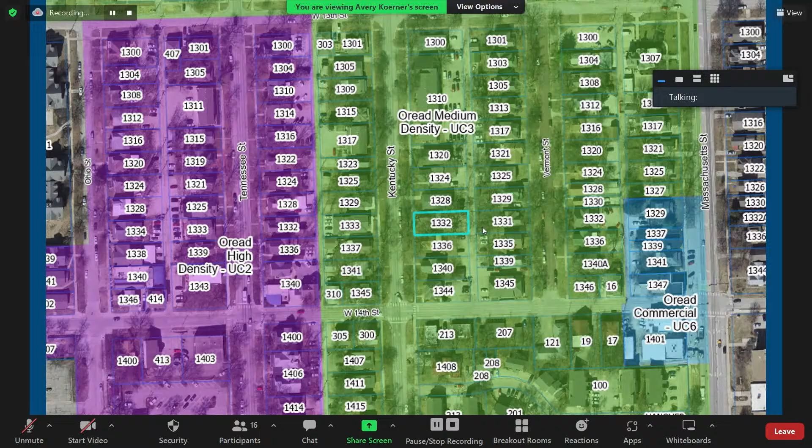The existing structure at 1332 Kentucky Street is a two-story dwelling with a stone foundation and crawl space. The rear portion of the structure is only one story, and there's a single-story addition on the south side. The applicant is requesting to demolish the two single-story portions of the structure, as well as the stone foundation of the original structure. The stone foundation would be replaced with a cast-in-place footing and foundation wall to allow for a full basement. A new single-story addition would be constructed on the south side, and a two-story addition would be constructed to the rear on the east elevation.

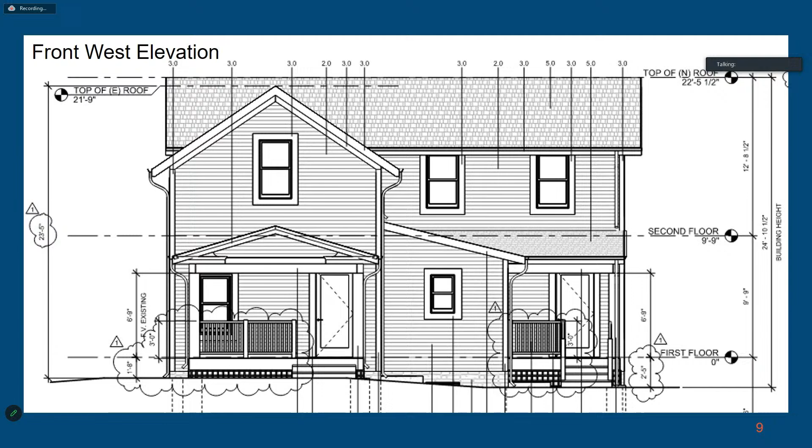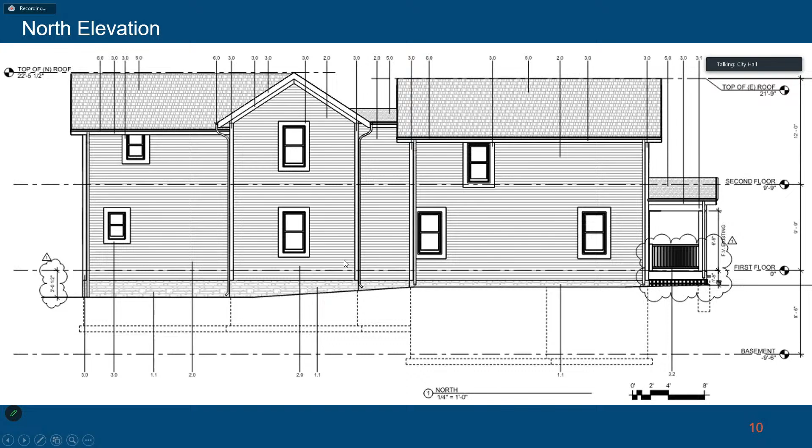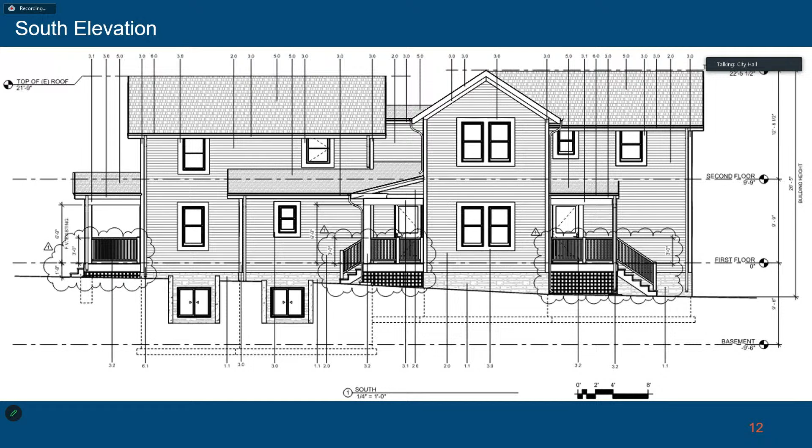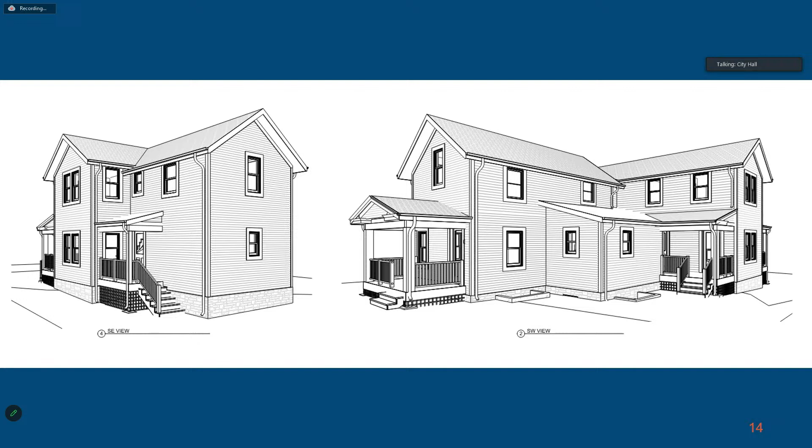The subject property is not a listed property, and it's not identified as a contributing structure to the Oread Neighborhood Design Overlay District. However, the original portion of the structure is older than 50 years old and does possess character-defining features, like the stone foundation. For demolition of existing structures, a structural analysis and a repair versus replacement cost analysis is requested to determine the extent of the damage. The applicant has supplied this documentation, which is included in your packet this evening. That documentation states that the structure shows signs of settling and cracking, as well as water intrusion, which has caused wood rot that's compromised the stability of the structure.

Overall, staff is of the opinion that the overall size and massing of the proposed addition is not compatible with the size of the existing structure. Therefore, the proposed project does not meet many of the applicable guidelines found within the Oread design guidelines. Staff is of the opinion that the proposed demolition work may be supportable if compatible replacement plans for the additions are proposed, and would recommend that the project be forwarded to the ARC. With that, I'd be happy to help answer any questions.

Thank you. Are there any questions for Avery before we move on to the applicant?

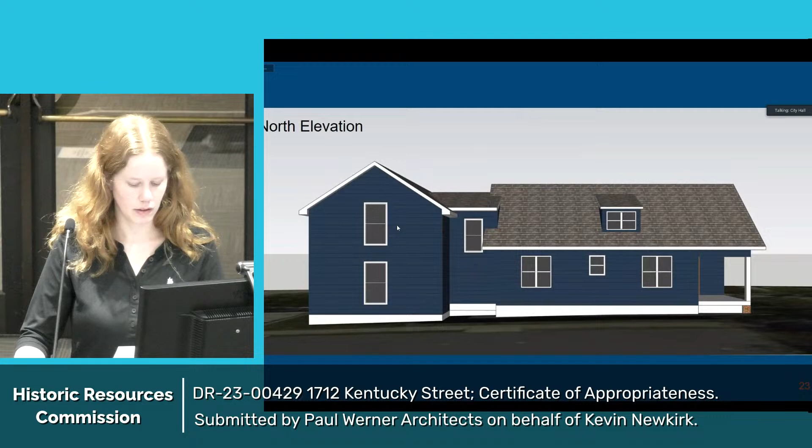The applicant did provide renderings of the proposed addition showing the existing structure for comparison. This would be the west elevation, visible from the front of the property facing Kentucky Street. This is the north elevation showing the proposed addition to the rear of the existing structure, and the south elevation showing the proposed addition to the rear of the structure.

Overall, the proposed project meets the standards and guidelines for review. The only concern for staff would be the exposed concrete foundation. Staff would recommend that it be clad with stone to match the foundation of the existing structure. But other than that, staff is of the opinion that the proposed project meets the standards and guidelines for review and recommends issuing the certificate of appropriateness.

Thank you. And with that, I'd be happy to stand for any questions.

Commissioner Johnson: I have a question. Would the recommendation actually be that we need to put a condition on this about the stone cladding on the foundation?

Staff's recommendation is that stone be used on the foundation to match the existing structure, but there are examples of exposed concrete foundation throughout the environs. Since this is an environs review, it's the least stringent review applied to a project, so that would be at the discretion of the commission.

And in the report, it mentioned windows. Is that still an issue? The applicant has provided information on the windows being proposed for the structure, the Andersen 100 series windows, which have been approved by the HRC on similar projects in the environs.

Would you like me to show you? Yes, please. And which elevation did you want? The front. And the south?

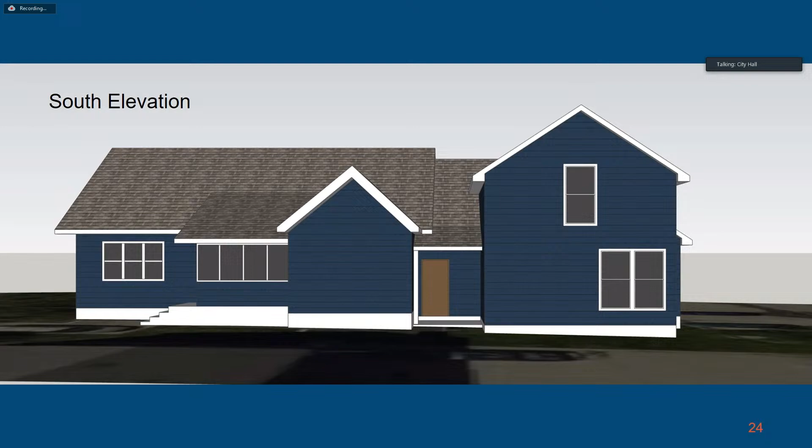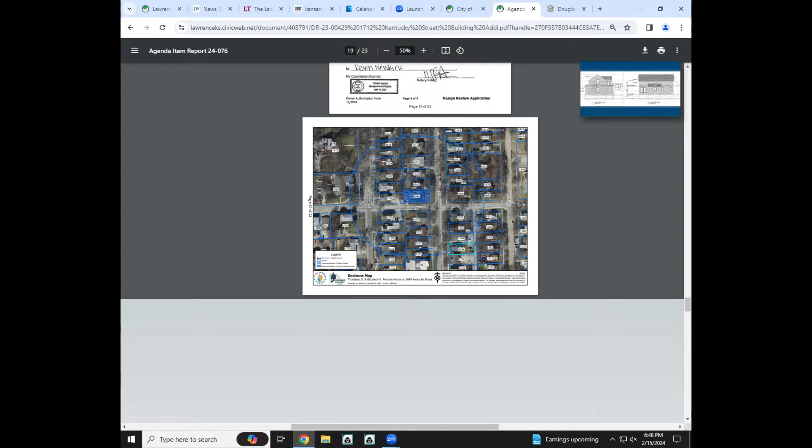Commissioner Meyer: One thing I'd point out from the applicant's packet, not to split hairs, but the area of the addition is not actually in the environs, so that environs circle actually cuts through—you can see it on slide or page 19 of the packet. It really just cuts through the original house on the property.

So especially if you're thinking about the foundation aspects, that new foundation isn't even really in there. Do what you want with that. Can I get you on retainer? Yes, yes. Always looking for the loopholes is what I'm doing.

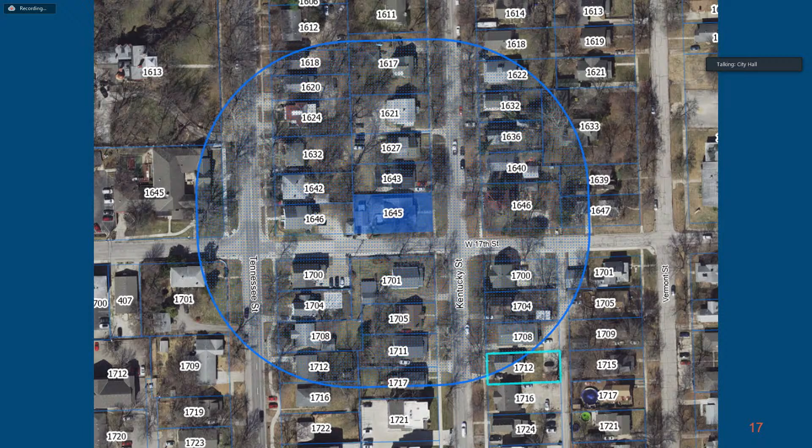When I was looking in the wall sections later in the packet, it shows detail of how close that grade is—you're barely going to be able to see it. Yeah, I would agree.

Additional thoughts? None. I'd like to make a motion that we approve it as presented. Commissioner Ezell, I second. Any discussion before we take a vote? No. We'll take a vote then.

Commissioner Johnson, yes. Commissioner Meyer, aye. Commissioner Ezell, aye. Commissioner Hawley, aye. Commissioner Klein, aye. Commissioner Haynes, aye. Chair Coleman, aye. Thank you, good luck.

Okay, moving on to item 3 of the agenda, DR 24-00001, 900 Pennsylvania.

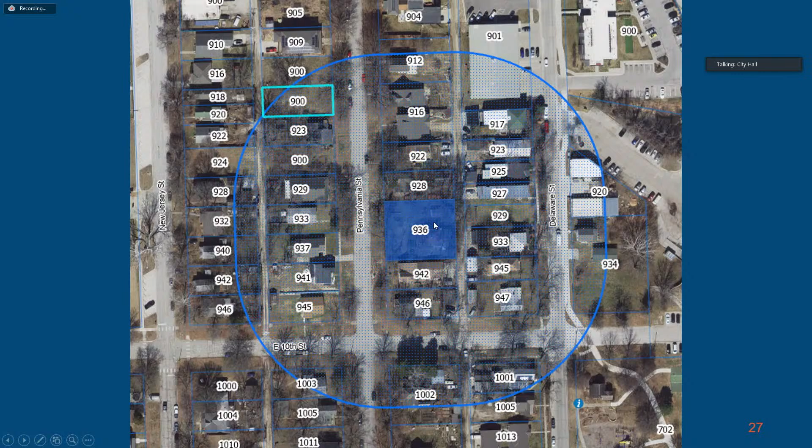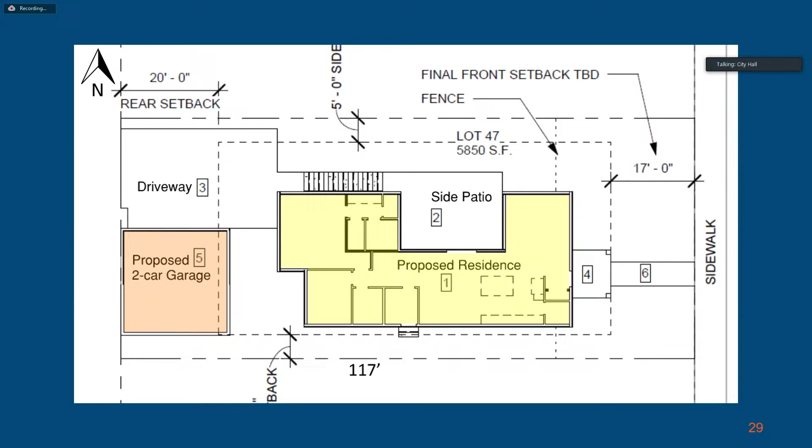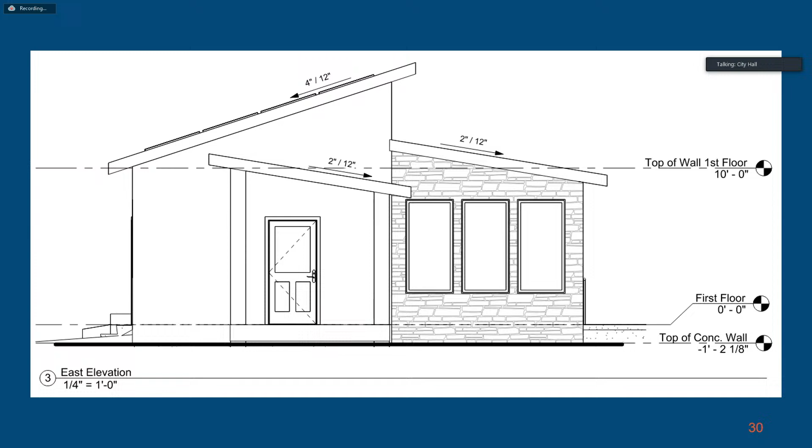Fiber cement lap siding with 4-inch exposure and 4-inch trim would be used on both new structures. The primary structure would include a model limestone veneer around the front northeast corner. The roof would have white soffits and light-colored asphalt shingles, and the windows used would be Andersen 100 series with black or dark bronze exterior finish.

This would be the west elevation, visible from the alley right-of-way. Here you can see the proposed primary structure, as well as the detached garage in the foreground. The subject property slopes east to west, so the primary structure would include a daylight basement. Per the applicant, if the grading allows for it, the basement would include a walkout, with doors as shown here on the west elevation.

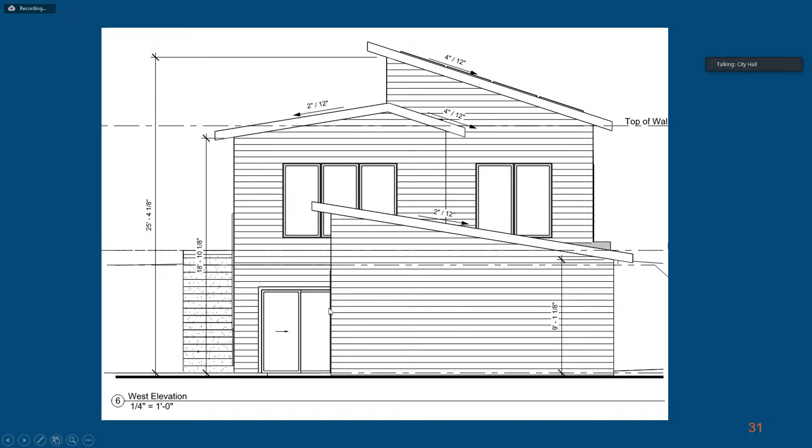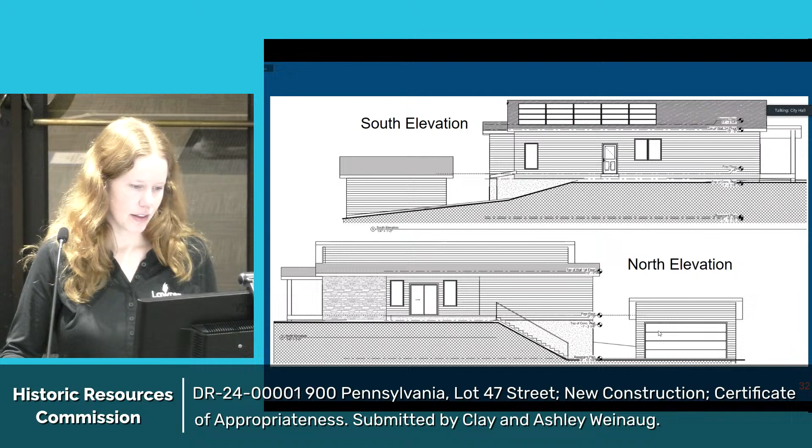These show the south and north elevations of the structure. On the north elevation, at the center, there would be a cutout for an outdoor patio. You can see how the grading changes from the east to the west side of the property, so that the proposed detached garage would be lower in elevation.

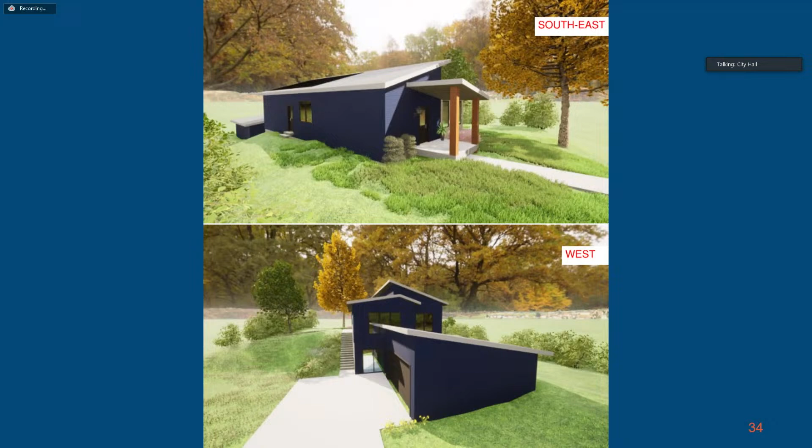At the bottom is the west view, looking towards the new structure from the rear of the property, again with the detached garage in the foreground. And then another rear view of the primary structure and garage on the north side.

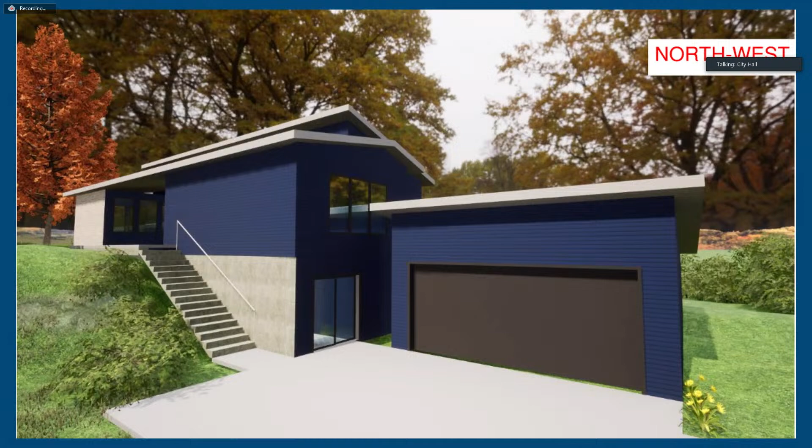Overall, the proposed project meets the standards and guidelines for review. The new construction would be modern in design and would most closely match the character of the environs along Delaware Street, which has had several newer additions and construction projects approved in recent years. The only concern for staff would be the use of cedar columns on the front porch. Unpainted wood is not typically considered an appropriate material type, and staff would recommend that the cedar columns be painted for compatibility. Other than that, staff is of the opinion that the proposed project meets the standards and guidelines for review and recommends issuing the certificate of appropriateness. With that, I'd be happy to stand for any questions.

Thank you, Avery. If there are no commissioner questions for Avery, we can move on to the applicant, if present. Oh, Commissioner Klein, did you have a question? The applicant can go ahead and speak first, and then I'll ask. Okay, thank you.

Good evening. Fran Luck with Schneider Associates Architecture. I'm the residential designer on this project. This is Clay Weinaug, the applicant. We're here for questions. I think the point was raised about the cedar columns. The desire is to keep them in their natural form because it goes very well with a modern concept, and it is less maintenance for the client. If you have any questions.

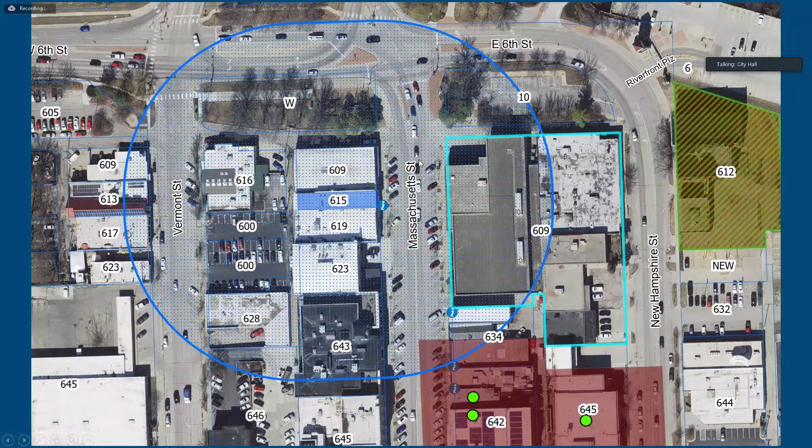Most of you will know this property is the Journal World Complex. It's this area outlined in the light blue here. It encompasses the property from New Hampshire to Massachusetts Street, from the alley that divides it from a small parking lot in 6th Street, and then down about half a block. The National Register Historic District actually starts to the south of this, and this property is not included in the National Register Historic District.

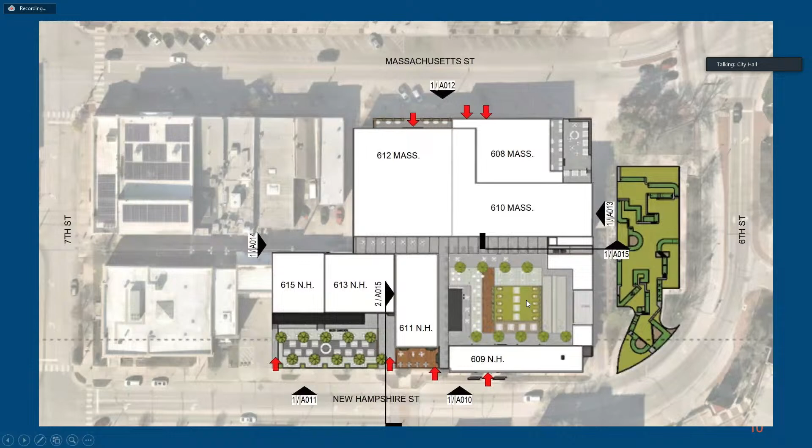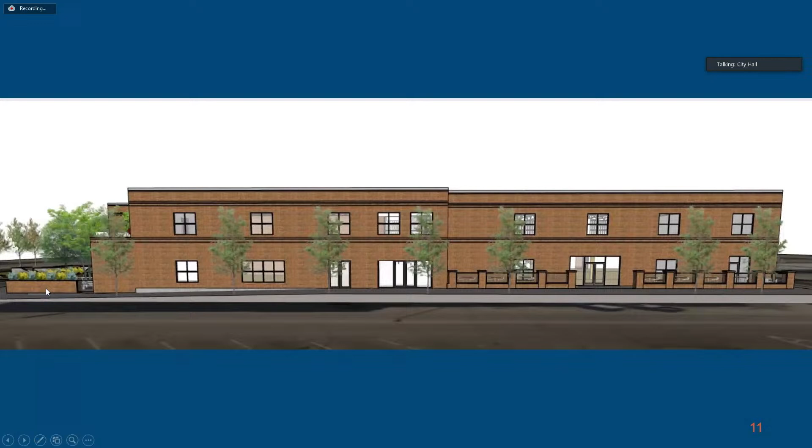The fence that has that recessed area would be maintained. That would be a little courtyard area that could be utilized by the new businesses. And then here on the very north end, you'd see there would be a new small fence here that creates a courtyard around that loading dock area.

This is a better rendering showing those loading dock doors would be infilled with glazing systems to allow for the new use, and then the creation of that little courtyard area there on the corner.

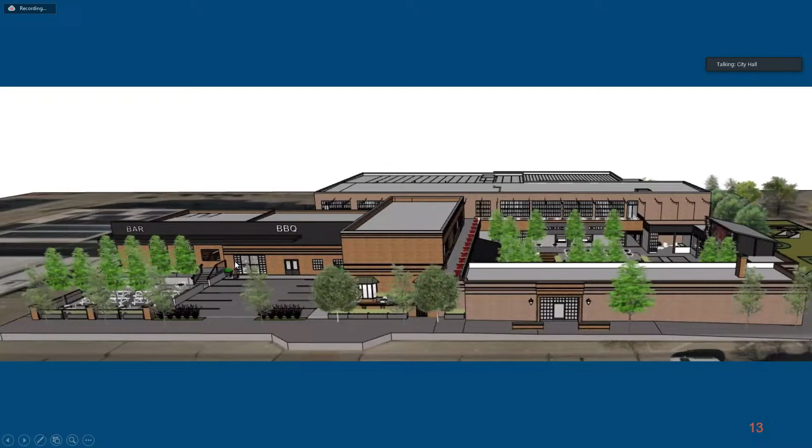And then this is the restaurant proposal that is part of your application for this evening. This is showing that elevation in a little bit more detail. That main door entry would stay the same to go into that courtyard area.

This, on the left side of your screen, is an addition that would enclose the existing loading dock canopy to allow for needed space for the restaurant, primarily their smoker units. It's a barbecue restaurant, so that would be enclosed, and then you would have the open restaurant area here.

The parking lot that exists in front of the structure would be maintained as a parking lot, but also would be designed so that it could be roped off at some points and used as extra outdoor space.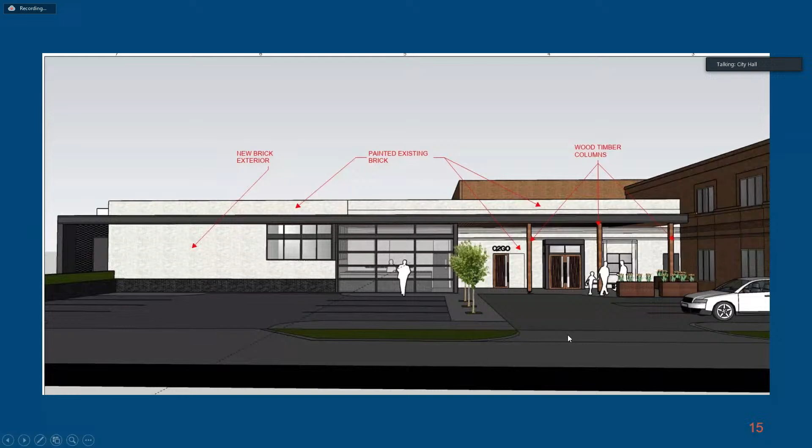This is showing that new brick addition, the brick and the storefront glazing system to create this new addition.

Something that's pretty exciting about this is, if you've noticed, there's a little alley that goes through between the Journal World building and the building closest to the south, and they would be opening a new alley entry into the building, activating this west elevation off of the alley that goes through here.

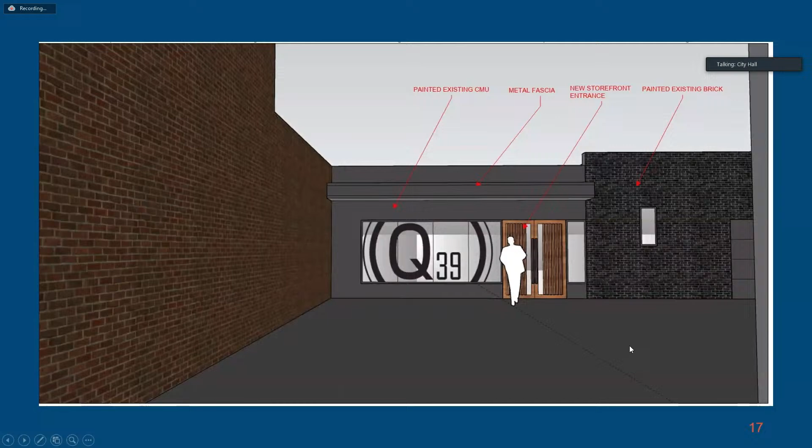This is a very unique project. We don't have this type of structure downtown. This is really our only big industrial complex located downtown. It's exciting to see it being rehabilitated in a way that doesn't cause the demolition and waste of building materials and energies already embodied in a structure that's already been constructed.

The guidelines actually speak to not having rough or unpainted wood timbers in storefront areas.

They're not specific to timbers for canopy structure. So those are all things that can be considered.

This was really challenging for staff to look at that context area, recognizing that the applicant wants to create a project where their restaurant stands out and has its unique identity in a building that's rather large and nondescript, especially on the New Hampshire Street side. Being sympathetic to that and looking at their design options, but staff looking at those design guidelines and the overall character of the neighborhood found those two elements not really part of the existing character of the area. Staff thought perhaps discussions with the Architectural Review Committee could work with the applicant on design alternatives that might help them achieve their overall goal and better meet the downtown design guidelines.

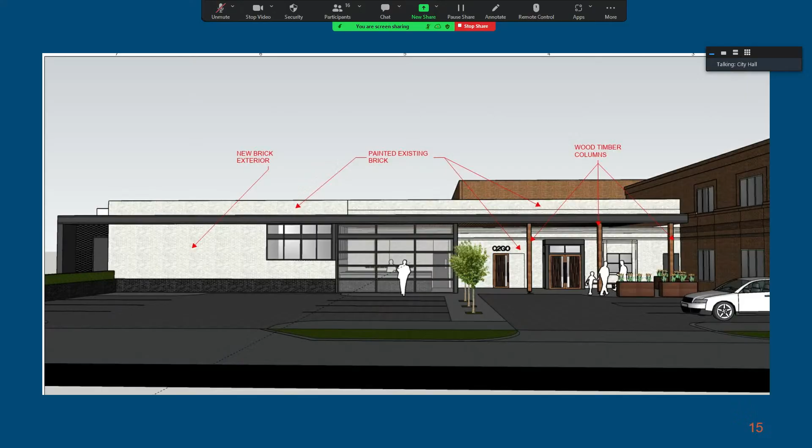Any other questions for staff before we hear from the applicant? Well, I have one, this is Commissioner Johnson. I really love seeing those windows on Massachusetts Street. I walked past there and thought, oh, if those were only windows. I'm wondering about the New Hampshire side, that main entrance, there's a big blank wall there. Was there any discussion of some windows along there? We have not had those discussions with the applicant about additional fenestration in this wall. It is an existing structure, and with their intent to remove the roof and have that as an open courtyard, there won't really be building behind that wall. It'll be open courtyard space, so I don't know if that's something they might consider in the future, or if that's a discussion you'd like to have with them this evening.

Thank you. Is the applicant present, and would you like to address the commission?

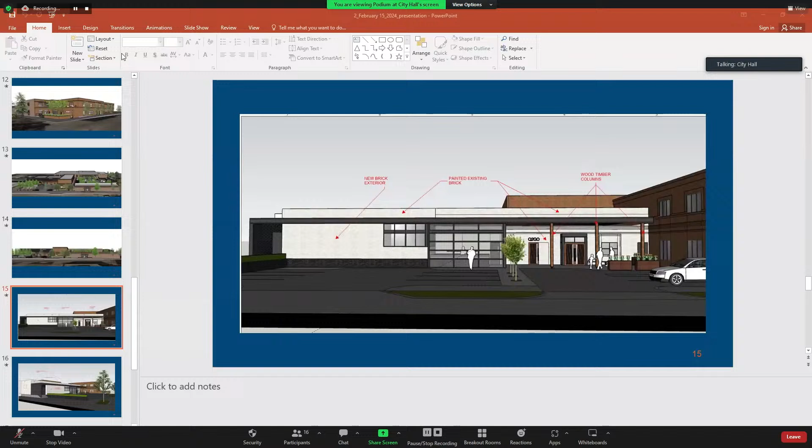Yes, sure. I've got a thumb drive, I'm going to try and put it in here. Okay, just bear with me one second. I also need to share the screen here. Log that up, share screen, and start slideshow on your PowerPoint. Gotcha, thank you, Kurt. Should be able to hit... okay. Oh, I don't think that's the right one. Yeah, you're right. It should be at the bottom. You want to come on over? Thank you. I think I need to do it through Zoom. Okay, there you go, okay.

It's a little premature to load these slides because that's really for the Q&A portion. So my name is Patrick Watkins, I'm a local attorney, here on behalf of 3D Development. Erik Wullschleger is on the Zoom call, and Dave Herron is with me here tonight. And Lynn is right, this is an exciting project, and you've probably heard a little bit about it. I want to set a little context here though. It's exciting because from a preservation standpoint, we've seen a number of applications on this parcel. Lynn has seen them probably more than your board, going back a ways before we saw the last one.

I think there's been 2 demolition permits considered for this site over the years. This is probably the first legitimate development that's actually considered saving the building. We had a conference center years ago slated for here, and just recently, in 2020, they were considering a grocery store and apartments. So this is the first developer to come to town with a development proposal that considers saving the building.

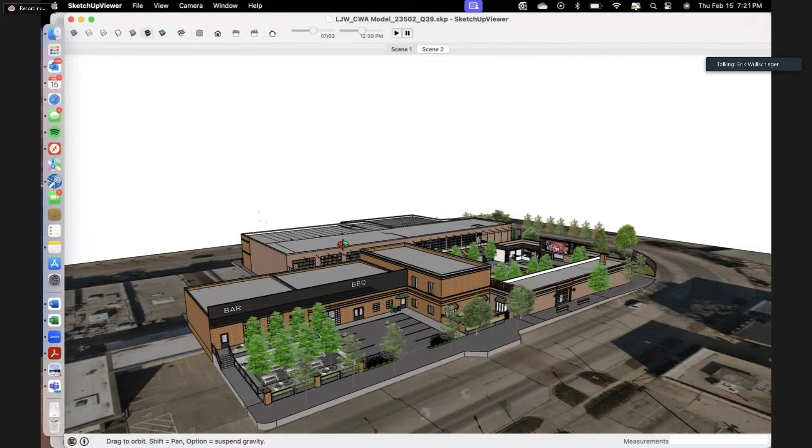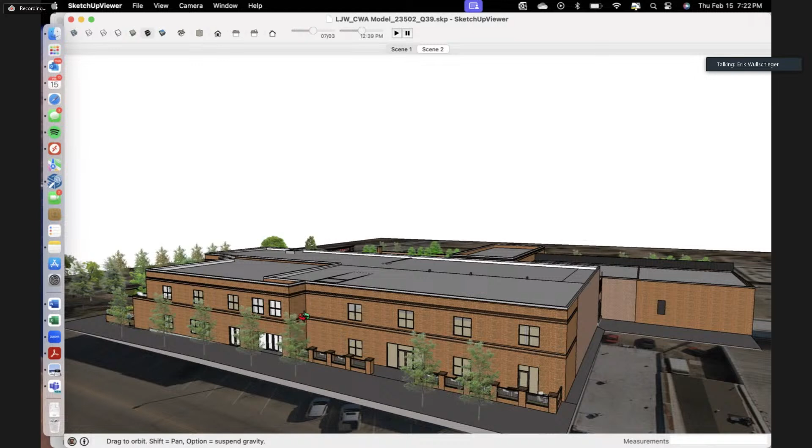Honestly, Lynn, you did a fantastic job walking through the project and giving an overview. But as mentioned, my name's Erik Wullschleger, and I'm one part of 3D Development here in Kansas City. We specialize in historic rehab, breathing new life into an old creamery building in Kansas City, an old Piggly Wiggly warehouse sitting in the Crossroads Freight House District, the Corrigan Station tower in the middle of the Crossroads, and currently spending a lot of time on the 230,000 square foot Kansas City Star production and press facility there.

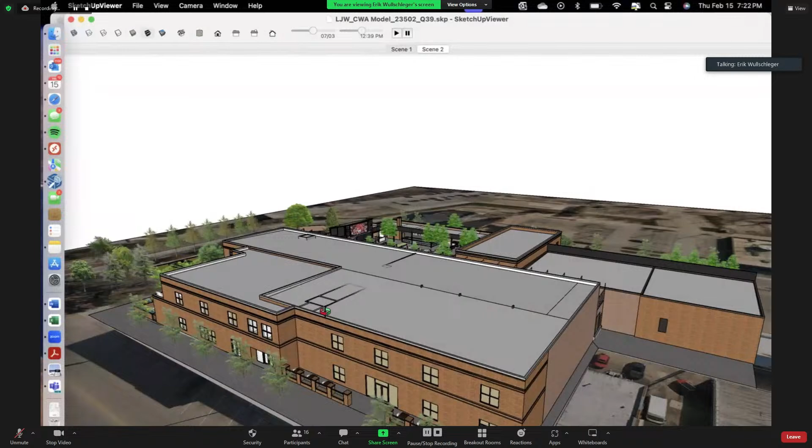It's not that we have a penchant for rehabbing newspaper facilities, but we do love finding ways to use these historic shells, or really well-constructed walls, which makes projects easier when you've got a lot already started and built. We love Massachusetts Street, and this facade has a big opportunity to breathe more daylight into the structure and interact more with the street. On the southwest corner, framed here as a square, this section is intended as a new 15,000 square foot office user that will activate this old patio with its own individual entrance, with a kitchen and dining facility right off the front so employees can eat and socialize on the patio while entering and exiting the property there.

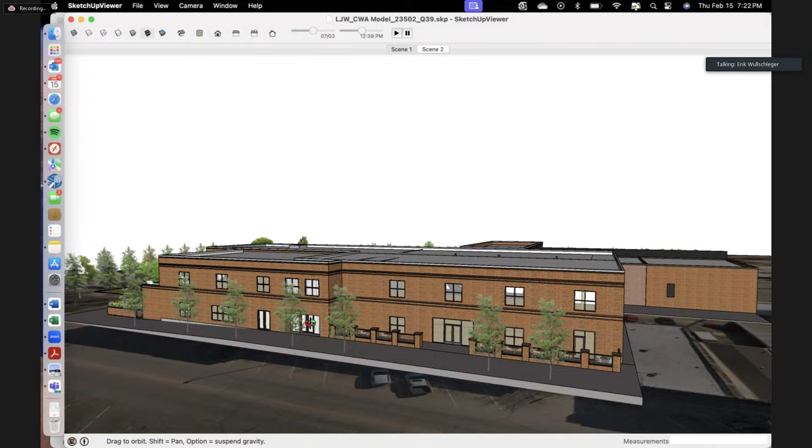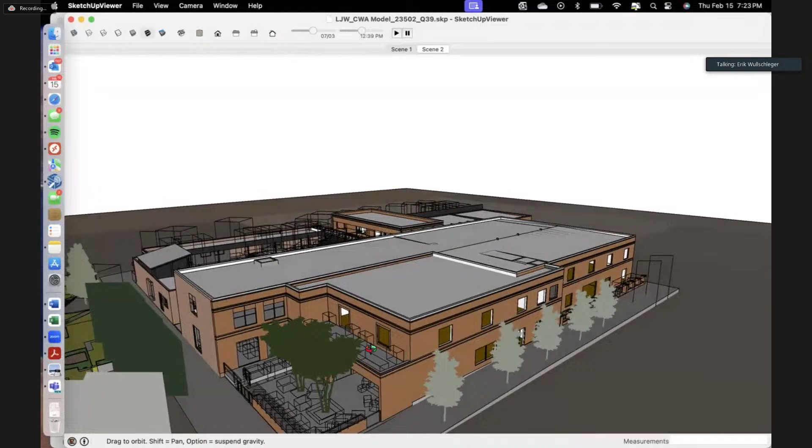The northwest corner has an opportunity for office space on the upper floors, which we're receiving significant interest in, and potentially another ground floor office or retail space. We do have an LOI out on a retailer here. As you continue around the property, we'll wall in a little area for a courtyard or patio. We're calling the project the Press Yards, the press being the obvious part of the name, the yards because of multiple indoor-outdoor spaces featured on this project, whether it's the lower level courtyard and patio or upper level patios that help communicate out to the main street.

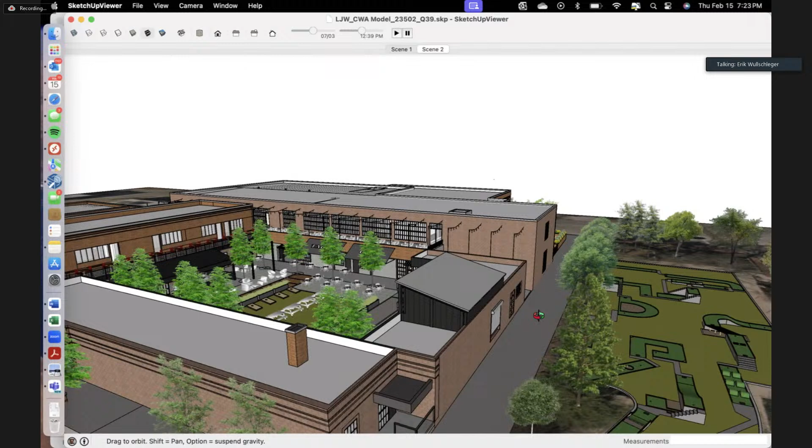Even across the north facade, which is an old alleyway, our plan is to breathe life into and lean into what is a cool old rail spur, finding ways to help the building communicate that, whether it's engaging with local artists, or punching out old openings that have been bricked shut or old doors, as more ways for this project to communicate out.

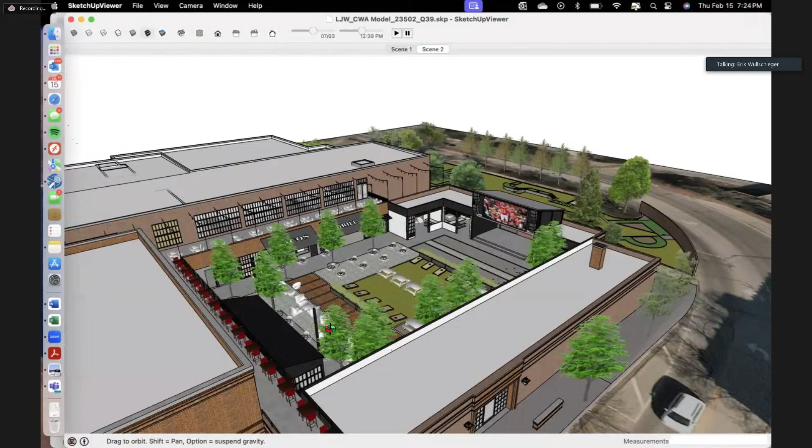It was discussed and shown here, this unfortunately unusable roofed-in area, which is very deep and dark. As pointed out, there are zero windows on the east facade of this building. Rather than try to repair and figure out a use for this really deep and dark space, we thought it was best to rip the roof off and create a really cool gathering place, something that could be greatly appreciated on Massachusetts Street or in this corridor.

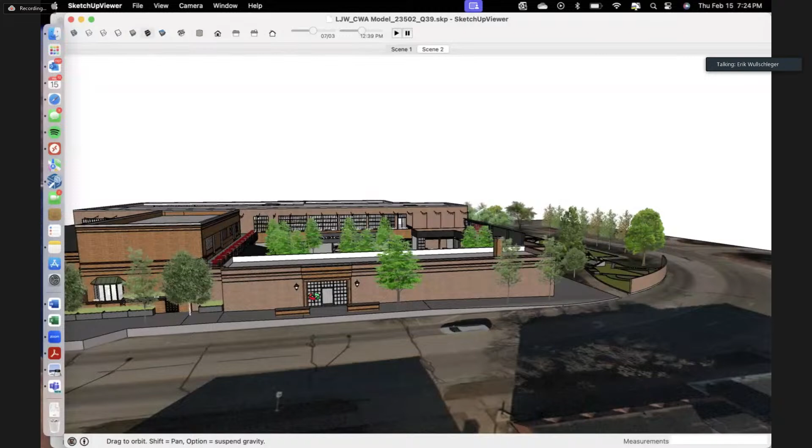Again, this facade has no windows, but we really love the original opening here. We think it's kind of a secret garden type entrance where, for those who know, you walk through and all of a sudden you're greeted by towering trees, a video screen, yard games, organic materials lining the floor. With the property, having a small food hall or a little tiny retail kiosk in here, being able to communicate inside and outside.

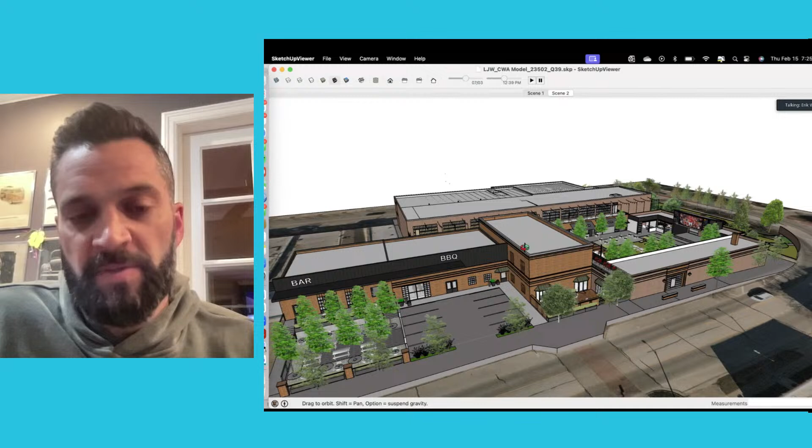We love the idea. We do a lot of smaller office suites in Kansas City. We know these 1 to 10 person companies are the ones coming and populating offices, going to lunches, networking, meeting, mingling. We see a huge demand for these. So this smaller executive wing of the building, we think, repurposes well as smaller office suites to complement the larger office spaces, as well as the potential for small retail, possibly a coffee shop, on the lower level.

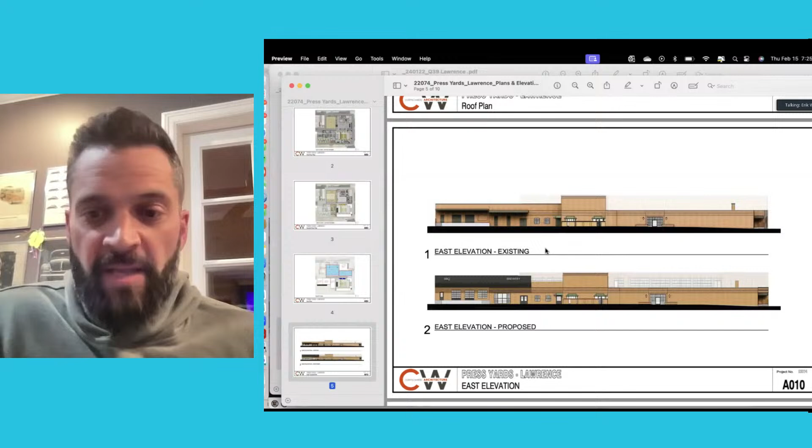Which brings us to what we'll probably spend the most time speaking on tonight. So far what I've shown you, and we can go through page by page if you want, or share this to show we're taking old enclosed openings and popping them open. For the most part, that's what this project is about.

When we get to this old loading dock area, this was an original design that Q39 has since enhanced. This probably represents the most significant change for the entire facade of the project. So I'll go ahead and pause there. If there's any questions for us as the developer, I can definitely field those now or later. But I think my main goal here is to really introduce Dave, the architect for the Q39 project.

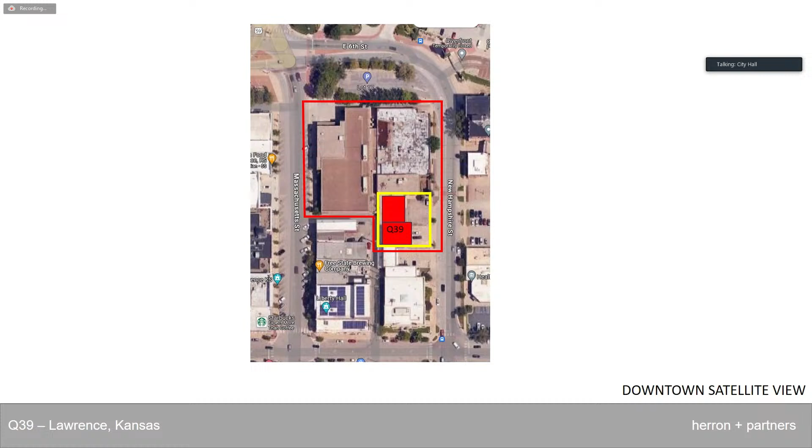I do want to point out that Q39 is going to take ownership of these two buildings, so they will have their own property, their own separate entity. She wanted to be an owner and not a tenant. She's also an anchor tenant, if you will, and wants to be part of the community and be a fixture here. So I think that's very important and part of the reason she wants to invest in this property. As you can see from the first slide, I think you're familiar with the site, but we are basically the loading dock for the press building. It's a utilitarian use, not architecturally that attractive, needs some love, and we're hoping we can provide that.

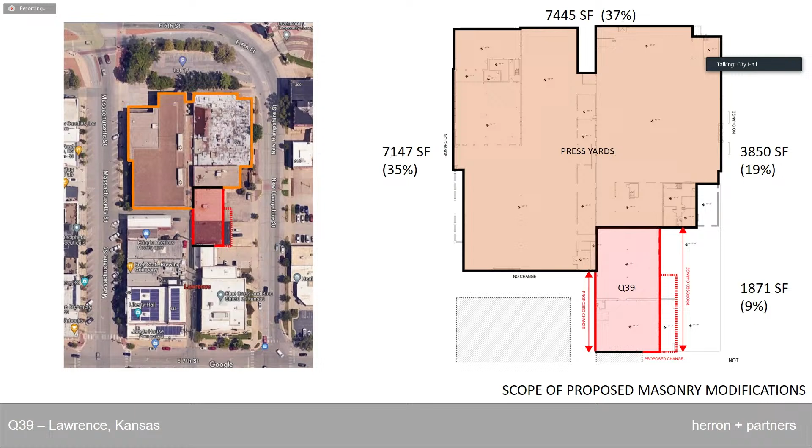What I wanted to show on the two slides: the slides on the left with the orange line are the major development of the project in which the facades are staying intact, and the red are the areas we're proposing to modify. The dashed line would be a new addition on the east side. What I've added here is the percentage of facade for the east, north, and west elevations. As you can see, our portion of Q39 on New Hampshire is about 9% of the overall facade of the project.

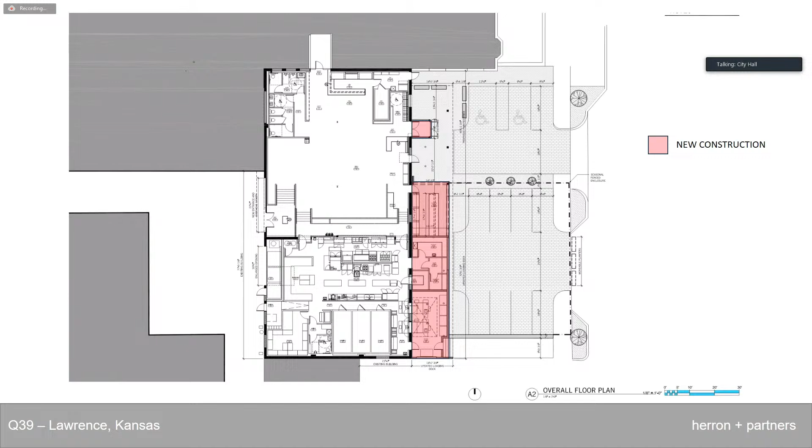Again, if you start to look at New Hampshire holistically, we're basically 9% of the overall complex development and 32% of New Hampshire when it comes to facade coverage.

If you break that down further, up top is the existing building rendering, and below is what we're proposing, with new construction in the foreground that would shelter and conceal the smokers, allow an expansion of the kitchen, and an indoor-outdoor operable door to allow for activation of the parking lot, which we're hoping to achieve for seasonal use. What remains is the red zone, the existing building.

So what we try to do is take cues from the existing building to create the new architecture. We've tried to respect the corbelling and avoid impacting it, and we put the canopy, which is part of what's already there, and created a new one with a colonnade. To keep that nice horizontal line going across the building, we put it in what I'm calling a frieze layer, so we're not being disruptive to the existing brick. We're also holding it off of the north side so it doesn't engage the existing historical building.

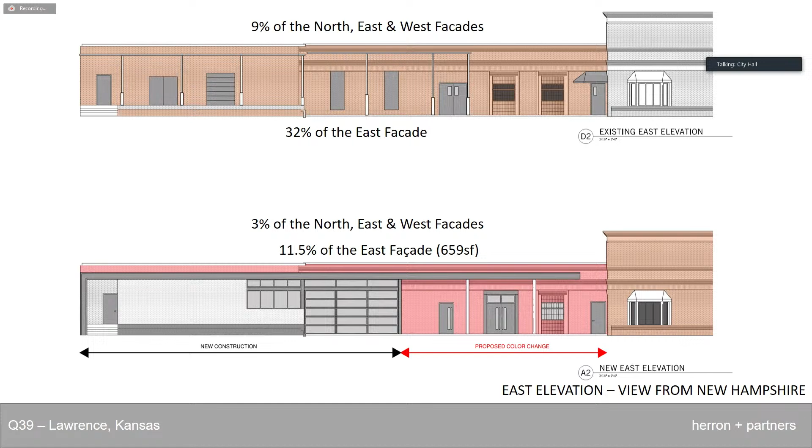These are some of the details when you get up close. We have the intermediate zone here, which is what I'm calling the frieze, and that's where it will extend the canopy. The corbelling actually stops and terminates with the existing canopy, which would be removed.

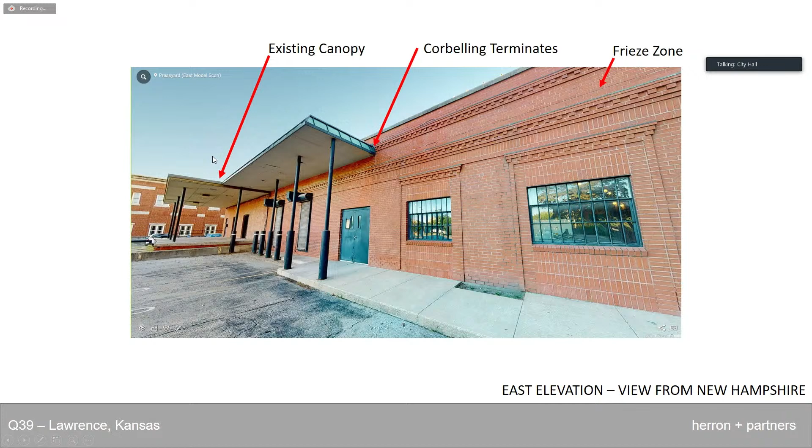We're emulating the columns. We are proposing wood timber columns because that is part of the vernacular we're developing as a company, and we want to have some similarities and concepts with the new and future restaurants we may have.

Very thankful for Lynn's explanation. I actually taught building science at KU, so she's exactly right. If you paint the brick with the wrong paint, it's going to create problems. There is a breathable elastomeric coating that we could use and are proposing. There's also a stain we've started looking into, which has a bit more durability. I have to check on the breathability, but it's an option we are exploring and are willing to explore.

This is kind of a view of the south. There's really not a lot of the building that is exposed—there's the portion here of the loading dock before it hits the adjacent loading dock to the building to the south, and also the alleyway. So again, just a small change to what would be visible.

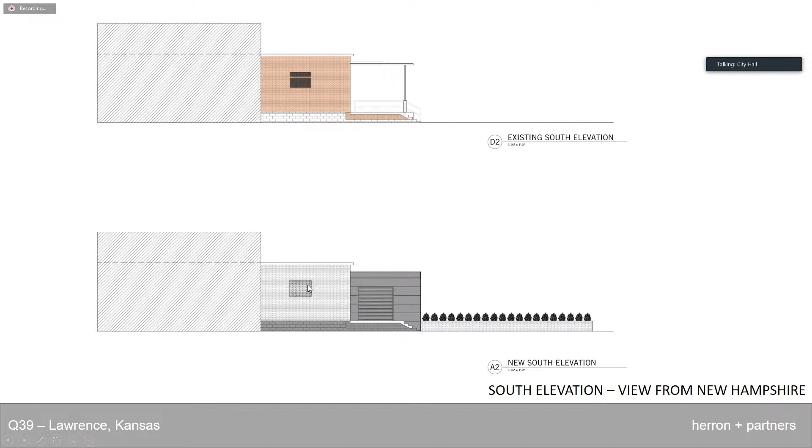This is a more developed drawing I've been working on since we submitted. Up top shows the existing condition, and on the bottom shows the new proposed condition. Right here would be an infill window that's just not working with our kitchen layout, for layout and security and whatnot, so that would be an infill brick area we would need to address.

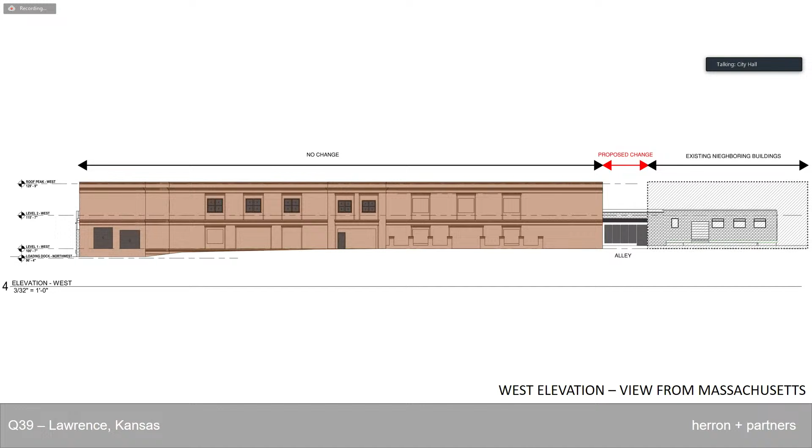We're dealing with trash service, and there's a lot of things we have to do on the back of the building. This is our only alley access. The 615 building is the only one at this elevation that we can service, so it was the natural home for the kitchen. We have to have our service back here, and there's no place to put our trash, so that's what the large overhead door is going to enclose. Then we have our main service access and a utility door.

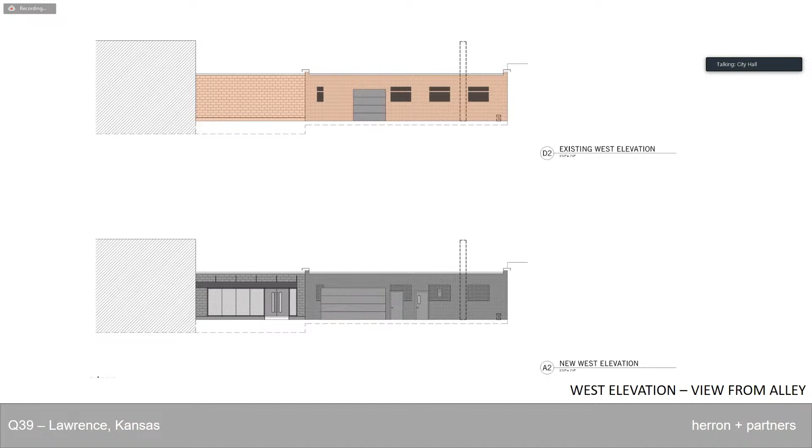On the left side, you'll see we're proposing a nice storefront. We'd like to illuminate that, and we'll go down a signage path on what's appropriate there, and then a small canopy for protection.

This is back to the front, east New Hampshire elevation of what we're looking at. Again, it's utilitarian in nature, and compared to the rest of the development, this is the ugly duckling. So the question for me, as an architect, is how do you do something appropriate, something that takes the right scale and perhaps the right materials, and apply it in a way that emulates something that's there?

My owner directive was to investigate this white masonry. We've looked at this Endicott glaze. There's not a lot of white brick, but there's a handful, and we've landed on this one. We think it's nice because it's rusticated — it doesn't look shiny and new, it has a little bit of texture to it.

The metal panel would be an accent to that, for the overhead canopy fascia, and that would come down on the south side. For the underbelly of the soffit, we'd like to clad that in either cedar or a composite. I'm with you all — I kind of like the composite if it's a good one, because it doesn't rot and it keeps its color and integrity longer.

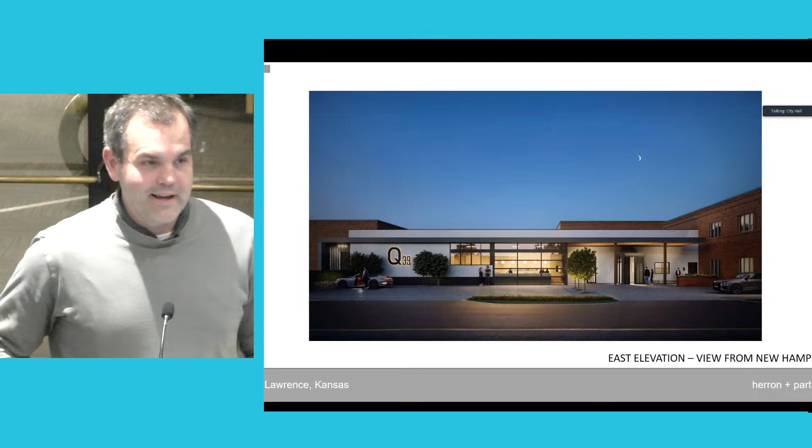Thank you, Dave. I'll leave this up. I just have a couple of concluding thoughts. You're all familiar with the design guidelines. This is the downtown overlay district, and it calls out the level of review to be applied to applications like this.

The highest level of review is for individually listed properties or properties contributing to the district. This, as Lynn properly noted, is not in the district — it's in the overlay area, but it's also not listed and not contributing to a district. The design guidelines specifically say that less scrutiny is applied to projects in the environs, and that's the expectation for this project, as I understand it.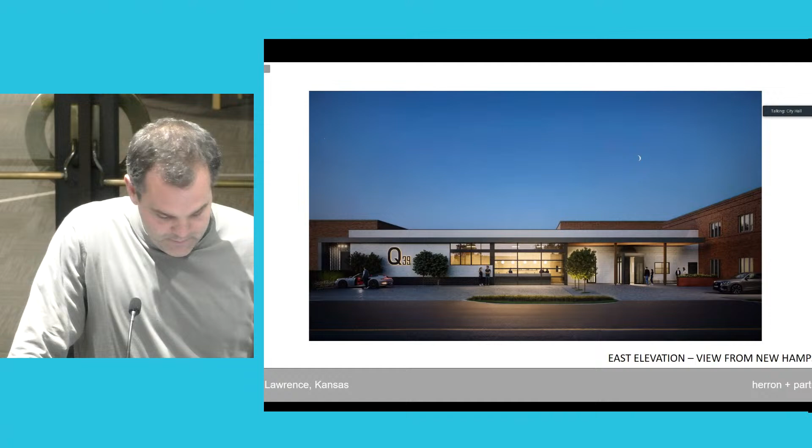The goals of design review are stated on pages 7 and 8 of the design guidelines. They simply state these guidelines are not meant to dictate design choices or serve as a checklist for good design. They're also not intended to be applied so stringently as to prevent creative or contemporary design. You're all familiar with these guidelines — that's our expectation for this review.

We certainly appreciate Lynn's review. We did meet with her on a number of occasions — she's been accessible, and this has been a long time in planning. She noted that most of the project meets the design guidelines, and I don't want to miss the opportunity to say what a major accomplishment that is.

This is a 70,000 square foot downtown building. How often are we going to be able to apply the design guidelines to such a large footprint? If applied to maybe 10 buildings in a row on Mass Street, an equivalent size, how often would we allow a deviation of one or two times? I'd like to at least have that context taken into account — this is a massive project.

We should also note that all of the Mass Street frontage, the main corridor of the downtown district, meets the design guidelines here, and that's also an accomplishment. Mass Street is the side of the building that faces the historically designated property. New Hampshire Street is the secondary area as far as the design guidelines are concerned, and certainly the 600 block of New Hampshire has its own issues with development and need.

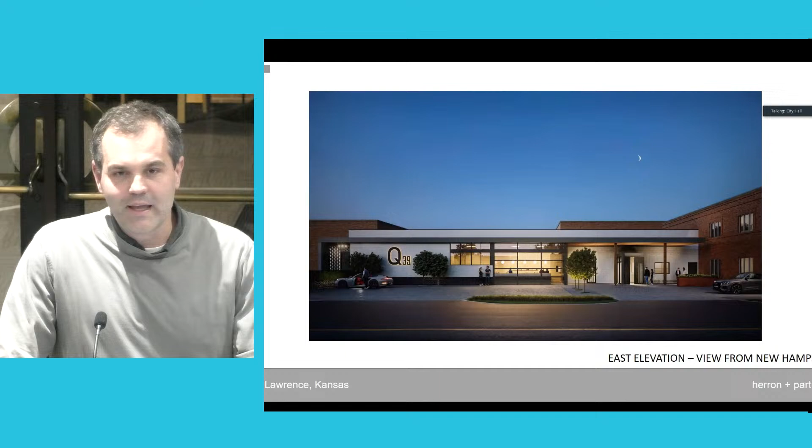Design review issues are really found in this loading dock area, and under every circumstance, this loading dock area is going to need some attention. Any development proposal is going to probably require some significant design changes. I used to deliver papers for the Journal World, and I used to walk into this circulation area daily, and it needs help. We're confident you'll take this into account, and we're happy to respond to any questions you might have. We're pleased to bring this to your attention tonight.

Thank you, Patrick, Eric, and David. I do have one question. We have this view up here of this facade - can David point to, for clarification for all the commissioners, where the new part is, how much of that loading dock will be removed, where the new part is built, and where the new part ends?

Yeah, sure, let me see. Can you see my mouse? See where the people are standing - that's the end of the loading dock. We haven't engaged my engineer yet, but per my discussions, that loading dock should be able to take a new construction load on top of it. So we're going to infill and slide in front of it with the new facade. The new facade does extend further past the loading dock to this edge of the garage door. So the areas that are painted would be here, here, and above.

Commissioner Meyer - Patrick, you kindly and repeatedly remind us of what the guidelines stated. As you noted, we know them. Is this the hill you're dying on? In terms of the staff report, it's generally pretty positive and optimistic. The only real issue is the white paint and the cedar columns. So is this it - is this the hill?

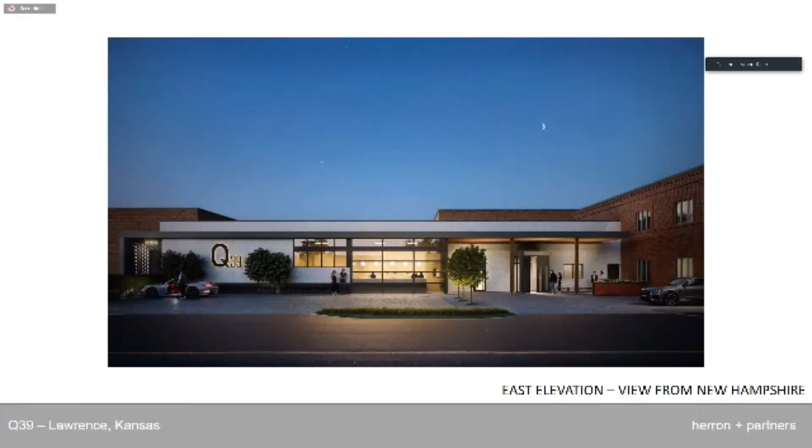When I first saw the white, it shocked me, okay? And I'm trying to imagine a platinum white, which is going to glare and call undue attention to itself. I don't think it needs that much attention for a new restaurant. I like the idea of a softer kind of white. This rendering right now, in nighttime or twilight I guess you'd say, looks reasonable. But when I think about a stark white, a platinum white, I'm thinking White Castle, even though there's no castle here involved. Anyway, these are personal aesthetic choices.

One of my big questions was going back to the north end. Why would you take the parking lot away from the parking for City Hall? What's shown in there right now is just conceptual. That parcel's a separate parcel, nothing that we own. We've just kind of played around with the idea of what we would do with it if we were to have it as part of this entertainment and mixed-use project.

Okay, because obviously if you want to make this retail, restaurant, office spaces, coffee house, courtyard, et cetera, to hang out and have meetings and what have you, people are going to need parking for this place. So I'm wondering, where are you planning on having people park? The people who use this every day, as well as the people who use it at night, where are they going to park?

We've had discussions with the city about utilizing the underutilized hundreds of parking stalls that exist just to the northeast, along the riverfront there in the old mall and current hotel. So what we've done, just through studying parking in the area, is find there's ample parking within a 6-block radius, but there's plenty within a half-block radius as well.

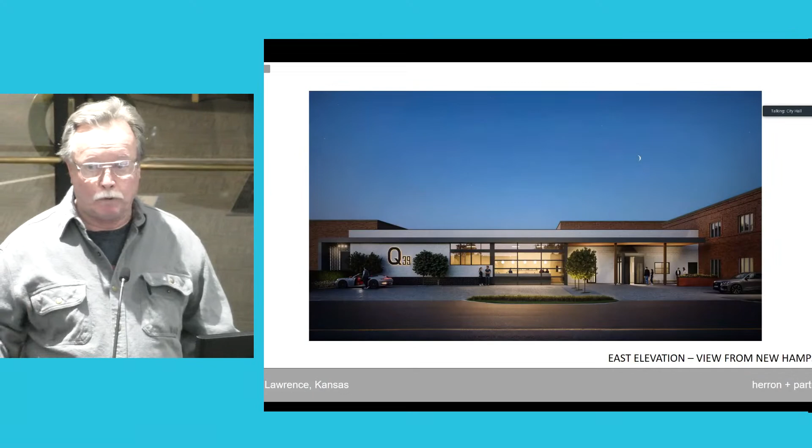Another thing I think should be explored - I realize the white is part of the Q39 brand, so the point I'm making is, does a branding color have to be on the entire building? I think of large interior spaces where there's a main field color but the client wants accent walls - a color that's an accent wall. What if the branding color on the exterior was thought of more like an accent wall process? Obviously where the sign is and where your entry doors are, you want that branding color, but does it have to be everywhere else too?

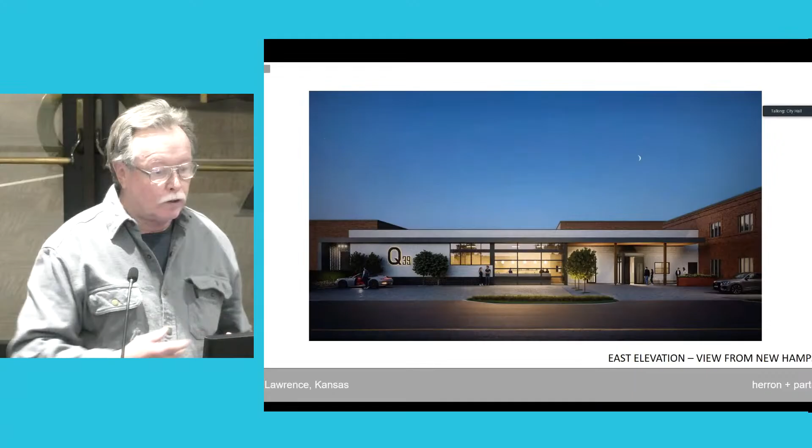On this rendering, the top of the building - is that a canopy there? That, what, 2 or 3 feet? Would the building look better if that was a continuation of the red brick that connects it to the rest of the structure? Maybe there are other walls on the side or west elevation where you don't have to paint it white to denote that you're Q39. I think that would be an interesting discussion at the ARC level.

Elastomeric is an interesting idea, although I worry a little about that. Elastomeric is generally a heavy-bodied material with high bonding qualities, so I would worry over time about that maybe causing spalling of the outer face of the brick.

I appreciate the general tenor of this discussion on both sides, that there's room for some conversation, and maybe it doesn't go anywhere, but before an irreversible decision is made, now's the time to double check. Are we thinking of all our options? Do we have to paint the entire building? Are there alternative painting materials that could work? Now's the time to do that at ARC, and best of luck on the project. Thank you.

Is there any other public comment? No? Okay. I agree with Dennis that there are options that can be explored, and we would be remiss if we did not explore those. I think it's a wonderful project, and I don't want to see anything changed except for that painted brick. So,

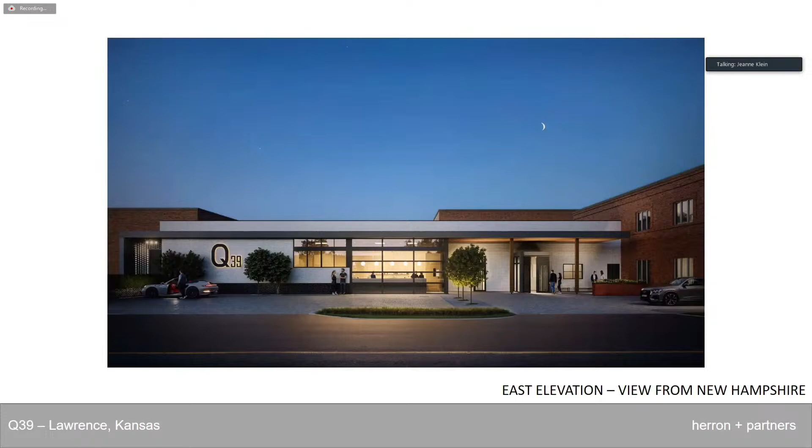May I ask a question? Yes. So when we move forward to the next step, I just want to make sure - the way I interpreted your comments was it was paint. But what I'm hearing now is it's paint and color that are objectionable? I think you're hearing comments about color. Okay, so I just want to know which one to address, or both.

I think the issue is the paint, and then we kind of got sidetracked by the color. I agree, at the heart of the issue, with the staff report - Lynn can speak to that - it was the paint, right? Yeah, we are asked to uphold these standards of not damaging or destroying. So we do have to consider the building, and it's not listed on its own. It's not in the district, but it is in the environs, and it's also part of the downtown design guideline district. So in thinking through those things, we maybe got out of our lane a little bit with color.

Any other discussion? This is Commissioner Johnson - I actually looked up the glazed white brick, and there are many images online of it looking very lovely next to red brick.

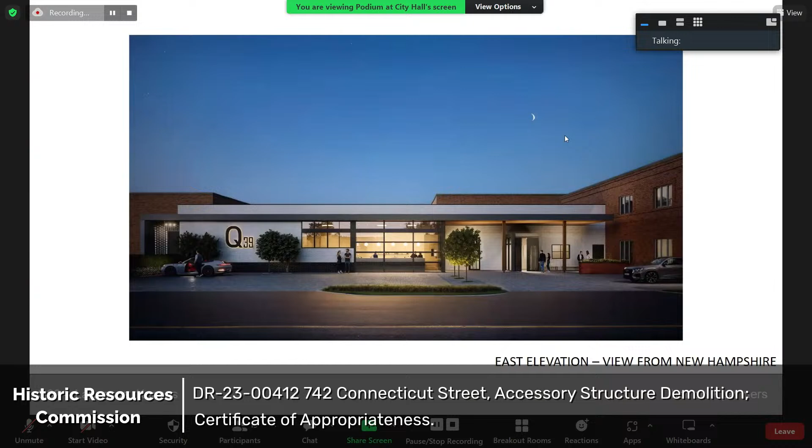Mr. Coleman, while Avery pulls that up, out of curiosity, do you know if there are real lintels in the recessed brick? They can solve it structurally, but can they just knock out the brick and put in new windows, or I don't know. Has it been analyzed to see how far - if it's recessed more than 2 inches, I would suspect there is, but if it's like an inch recess, I would suspect there's not, but I haven't looked that closely. Solvable, I was just curious. Yeah, never been inside the building. Top right corner, there you go. Thanks.

Okay, so this next item is DR-23-00412. In this application, the applicant is requesting to demolish and construct a new accessory structure at 742 Connecticut Street. The subject property contains the R.W. Spar House, which is a designated landmark in the Lawrence Register of Historic Places, and the proposed project requires a certificate of appropriateness review. This map shows the location of the listed property and its 250-foot environs buffer.

The listed property contains a single-story cottage and a single-story detached garage located in the northeast corner of the property. This is the front west elevation of the primary structure of the R.W. Spar House. The property was owned by R.W. Spar, who was one of the city's leading brick manufacturers and is responsible for producing most of the brick used to build early Lawrence. The property was designated as a landmark in the Lawrence Register of Historic Places in 2014 for being a good example of the type of house constructed in Lawrence between 1864 and 1873, and for its association with R.W. Spar.

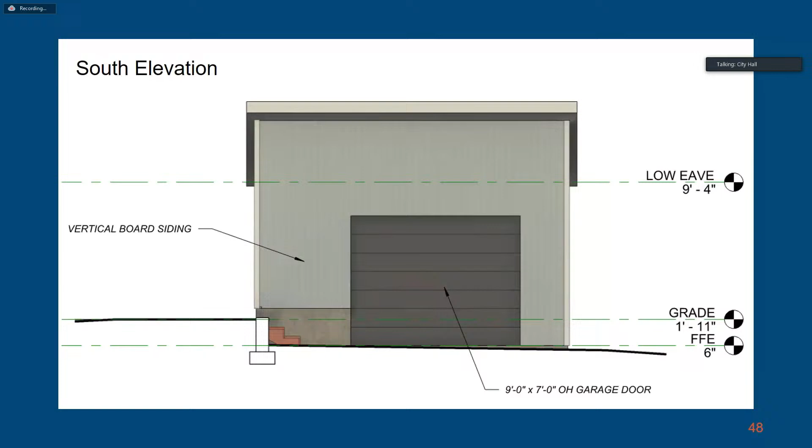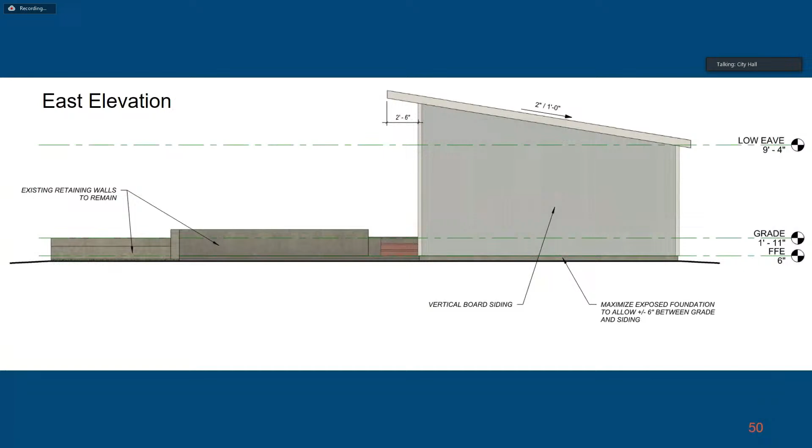This would be the south elevation of the new garage. And then this would be the east elevation looking towards the structure from the alley. And then this would be the west elevation, which shows a pedestrian door and then a rough opening for a future window. And this would be the elevation that would be visible from the primary structure of the listed property.

And then these are two renderings that were submitted by the applicant showing the southeast view of the structure from the alley on the top. And then on the bottom, a southwest view of the structure looking from the listed property.

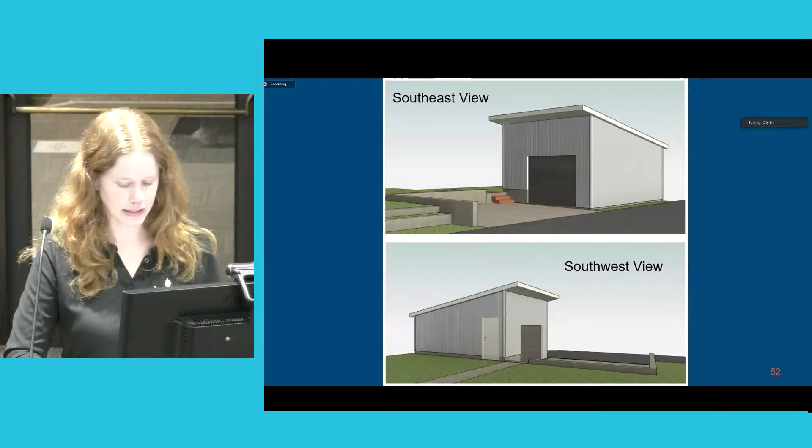Staff did request additional info on the height of the existing and proposed structures for the site, which the applicant did provide. The height of the existing primary structure would be approximately 12 feet, 8 inches. The existing accessory structure is approximately 9 feet, 8 inches tall. And then the proposed garage would be approximately, or just over, 11 feet tall.

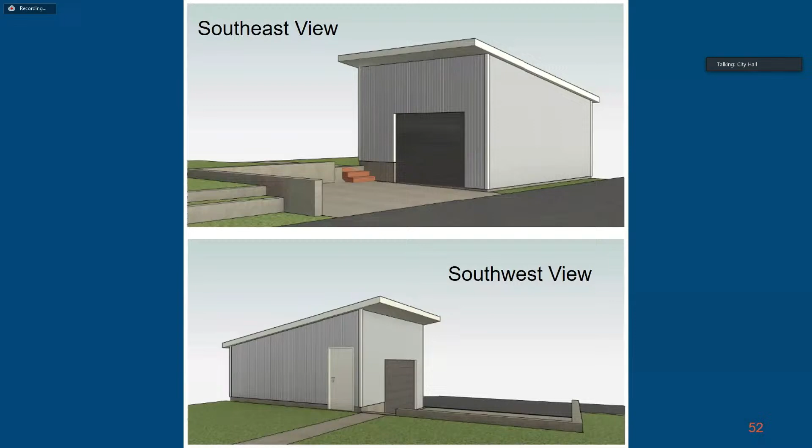So the existing detached garage is included in the landmark designation for the R.W. Spar House, and demolition of the existing structure would remove historic material from the site and alter the character of the listed property. Based on the info that was submitted by the applicant, documenting the condition of the existing structure, demolition may be supportable if compatible replacement plans for a new detached garage are proposed.

Staff is of the opinion that the proposed plans for the new garage would not be compatible given the size and scale of that new structure and the proposed vertical cement board siding that's proposed. So staff would recommend that the project be referred to the Architectural Review Committee for possible design refinement that would allow the project to better meet the standards and guidelines. And with that, I would be happy to stand for any questions.

Thank you, Avery. I missed the 12-foot, 8-inch dimension. What was that of, the house? Yeah, that would be the existing primary structure on site, would be 12 feet, 8 inches. And the 11-foot proposed is to the highest part of the... Yeah, that's my understanding. Thank you.

I probably should provide a clarification. I'm going off of the Land Development Code and how they determine the height of a building. So it'd be measured to the midpoint of the roof, basically. Oh, okay. Yeah, of all those structures.

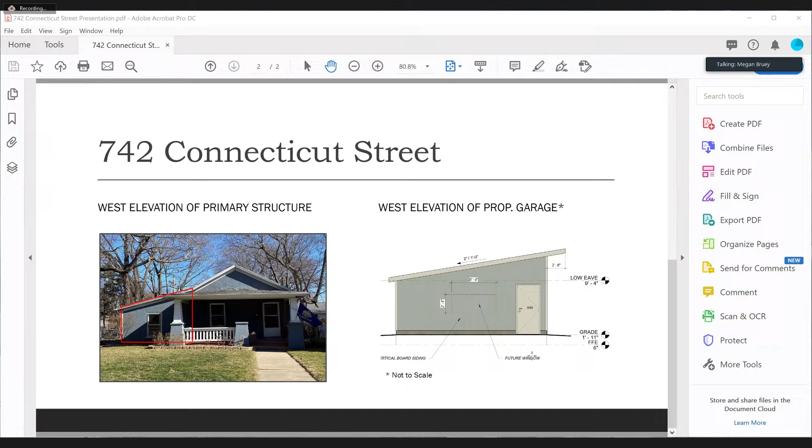Thank you. Thank you very much. Yes.

I have a question, Commissioner Klein? When I was looking at the brick falling apart in the garage, do you have any idea if that is actually Spar's brick, the brick that Spar manufactured, or is that like 20th century brick? The structural analysis and photos show the garage is beyond repair, that it would be prohibitive to save it, but I was just curious about the blocky bricks themselves. Do you know if these are worth saving versus just using new material to rebuild?

I don't know the answer to that question, to be honest. I just know from staff's report, or maybe from the historic listing of the structure, that the garage is later than the house. It looks a whole lot later. That's why I was curious if the brick is 20th century or earlier, perhaps manufactured by Spar's company. I don't think so, but it's something to think about, as opposed to throwing the brick away. Good question, but unfortunately I don't know the answer.

Looking at the photos, it looks to me like a hollow structural clay tile that was popular from the turn of the century to the 20s or so. That's typically unreinforced—the cells align parallel with the striations on the face of the tile, so it's impossible to really reinforce since the cells go this way. You can see all the cracking. It's tough stuff to work with. As a peanut gallery comment, I'd be disappointed if a major manufacturer of masonry used that product in an exterior condition on their own house.